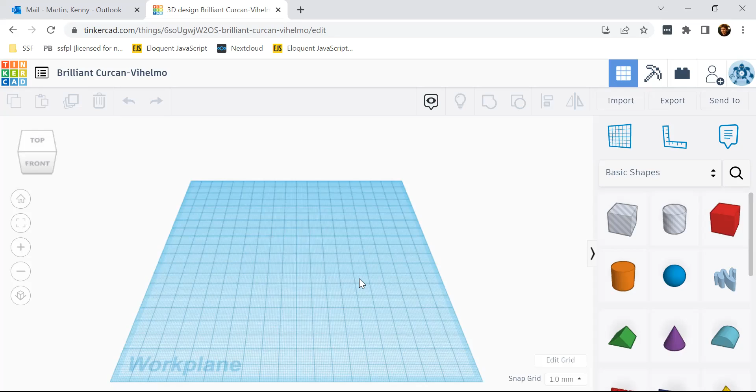So you want to make sure that your designs are on this work plane, or at least part of them is.

Up here it always gives you a random name for your project. I'm going to go ahead and change this to Picture Frame.

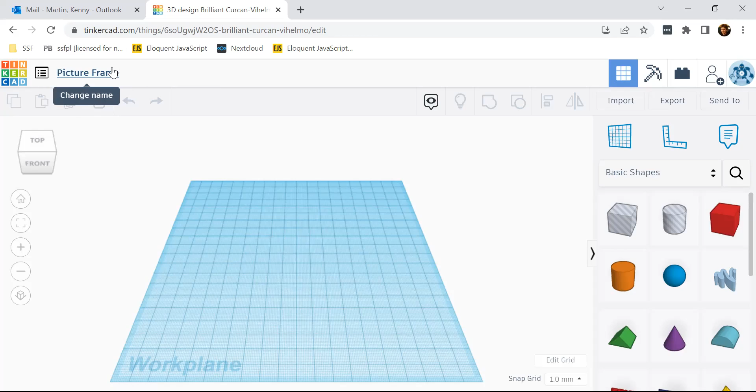Hit enter, and that renames it, so it's a much more meaningful name, and it'll be easier to tell what this file is when I'm looking at my list of files.

To go over some basics of Tinkercad, you have different shapes over on the right-hand side here. You can drag them onto the plane, or you can just click, and you'll see this outline of a box.

It'll stay as an outline until you left click again, and then it will place it down wherever you click.

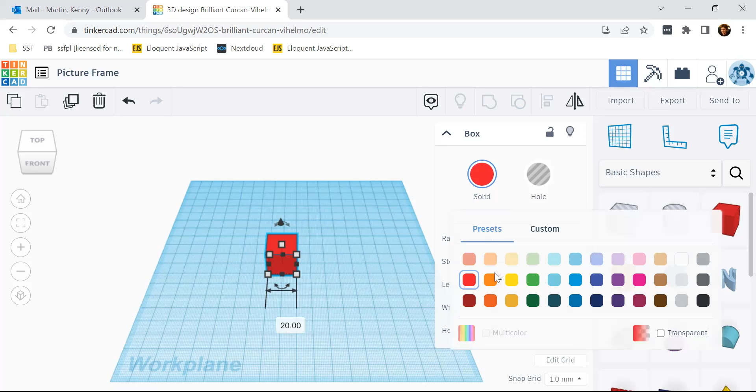One thing I want to point out: don't worry about the colors of the objects in Tinkercad. The color of your printed file depends on what color filament you load into the 3D printer, and it doesn't matter whether this is red, orange, or purple.

The colors in Tinkercad just help you distinguish between different objects, so we'll stick with the default red.

Now, some things you can do with an object—maybe first I should explain how to change your view.

You can use this box in the top left of the screen to change your orientation. You can click and drag it with your mouse to rotate it, or if you want to go to the front, just click on the front and it'll go like this.

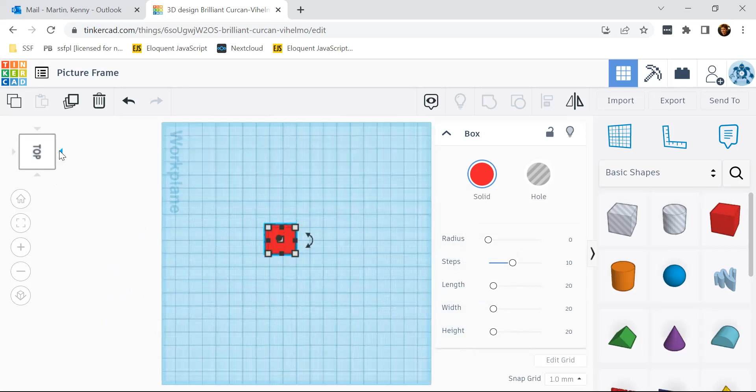You can also use the arrows to turn it, and that will put you directly in that direction.

Another way to change your viewing angle is to hold down the right mouse button and drag your mouse cursor around—that changes your view as well.

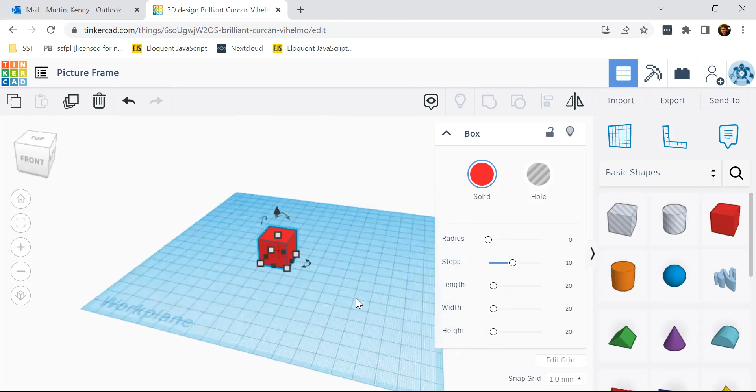Another useful thing to know is you can zoom in and out. If you scroll down on the mouse wheel, it'll zoom out, and if you scroll up or forward, it'll zoom in.

So you'll see there's really 4 different icons here that you can use to adjust the box in some way. There's these white corner ones that will increase or decrease the size of your box in all directions. You can see doing this, it doesn't increase the height, but it does increase the length and width of your box.

I think it started out at 20x20, something like that. I don't know, let's see. Okay, there we go, back to 20x20.

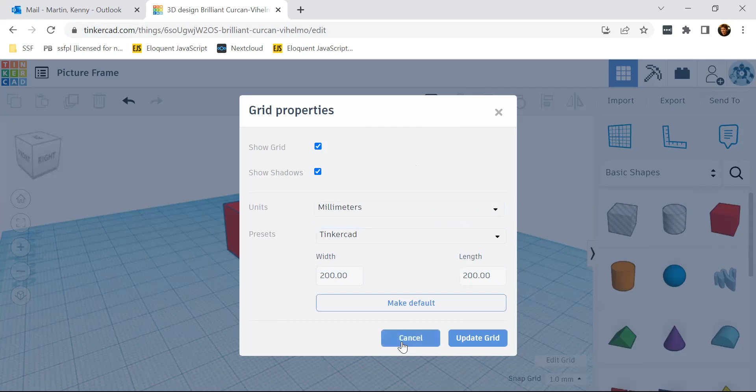Okay, so the last two that you will want to know is this black cone shape at the top here. This basically doesn't increase the size of the object in any way, but it does increase how far up and down the box is. So you can see I lifted it up, so now there's space between the work plane and the box.

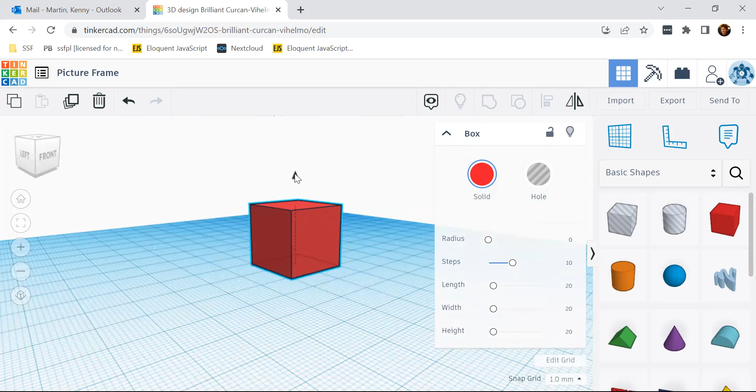Zoom out a little bit. We want this number right here to be 0. That lets you know that you are on the work plane. Anything below the work plane will be negative. You can see it's -1, and I'm a little bit below the work plane.

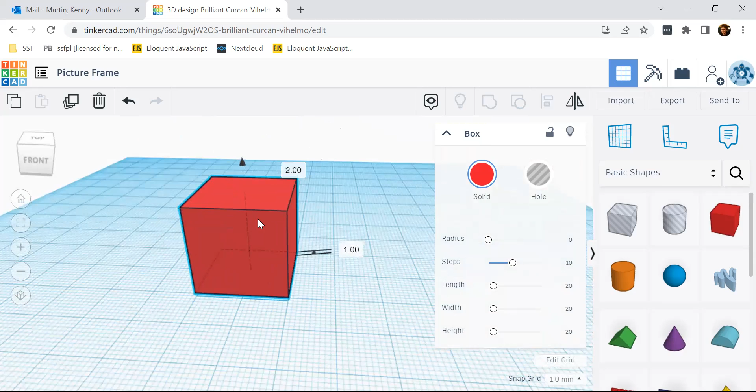And any positive number in that box means that I'm above the work plane. So I'm at 0, now I'm at 1, and I'm a little bit off of the work plane. So we'll go ahead and put that back to 0.

All right, and then lastly, there's these curved arched arrows. This basically lets you rotate the object in any number of directions. So I could go ahead and turn this 90 degrees. It's a box, so that doesn't really make much of a difference. But if I had designs on these sides, then I might want to rotate it.

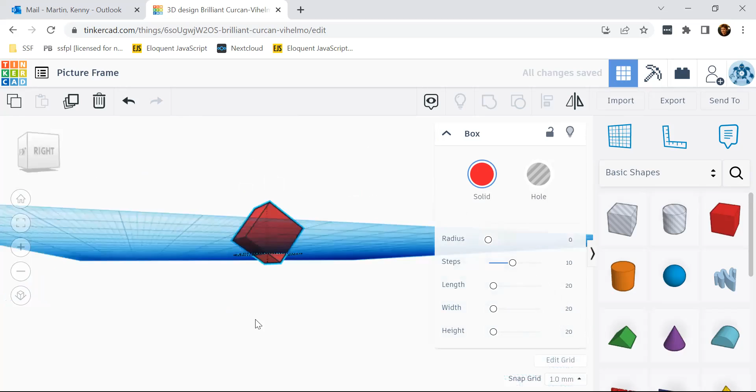But you can see, you could rotate it this way. And if you wanted it to be like at an angle, for example, you could leave it like that. Okay, so we'll just go back to 0 there. Okay.

I think that's the basics of Tinkercad. There are more advanced concepts that I'm going to be going over, but that is part of the design of the photo frame. So I may just start designing the photo frame, and then when I get to those more advanced parts, I'll slow down again and explain things a bit more.

Maybe before I go into the making of the photo frame, I'll just show you over here. Right now, this is set to basic shape. So you have the box, you have a cylinder, you have like a roof shaped object, you have a cone.

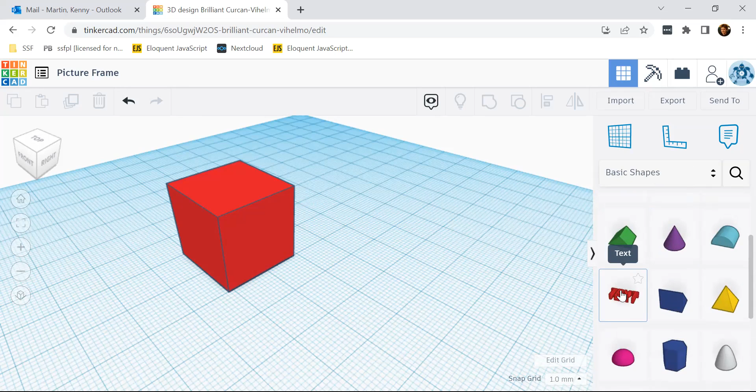If you want text, this changed, I think, recently from when I first learned Tinkercad. When I first learned Tinkercad, there were individual letters that you could drag onto your work plane. I think that option might still exist, but I know that you can also just drag this text shape. They categorize it under basic shapes, and you can change what the text is right here.

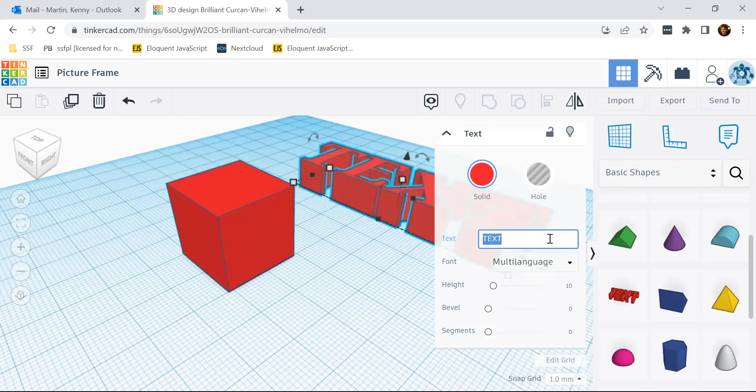So if you wanted to put your name, for example, I could type Kenny, and that text has changed to Kenny.

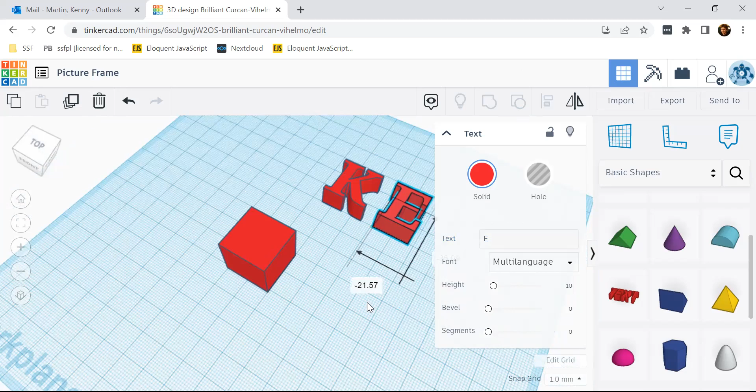You could also just make it one letter, K, and then if I wanted the next letter to be separate, I could do the E, and now I'll have two objects instead of one object, so I can move them separately.

To move an object, you can select it and drag it with your mouse, or use the arrow keys on your keyboard. As long as an item is selected, you can see the K is selected because it's got a blue outline and dots around it. Also, this box is open right here, showing that the text is K.

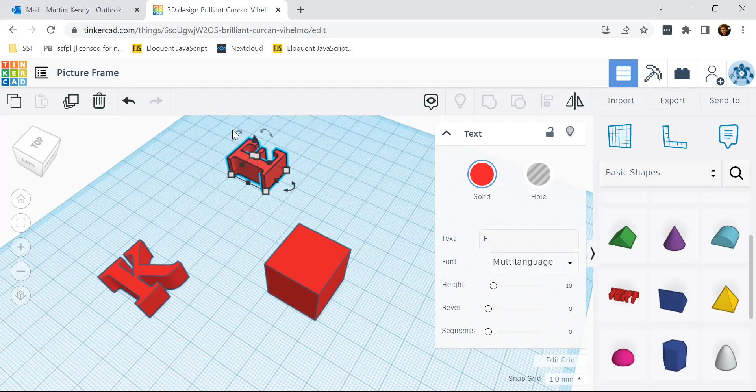So that's how you know it's selected. If I were to select E, this box would show up showing text E. The E is highlighted. If you click on the box, it tells you the box is selected, and then you have some customization options right here. If you don't have anything selected, then there's no information box here.

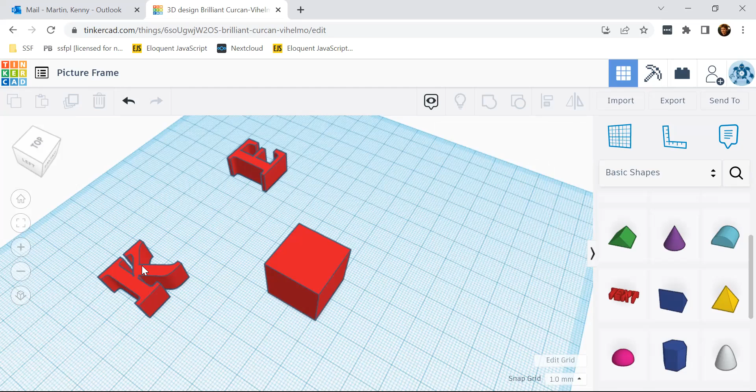I think now is the time to start with the steps of the photo frame. So I'm going to select both the K and the E, and you can do that by selecting one and then holding down Shift and selecting the other.

So you can see now it's changed to shapes 2. I'm just going to go ahead and hit this garbage can to delete them. You can also press the delete key on your keyboard.

Okay, so I need 2 boxes to start the photo frame. Now I could just click on a box here and bring another one onto the work plane. That's totally fine.

But another thing you can do is select this and then choose either copy or duplicate. I'm going to go ahead and just do copy. I'm on the top left here, circling my cursor - it's the leftmost one, copy. You can also hit Control-C, and that will also copy it.

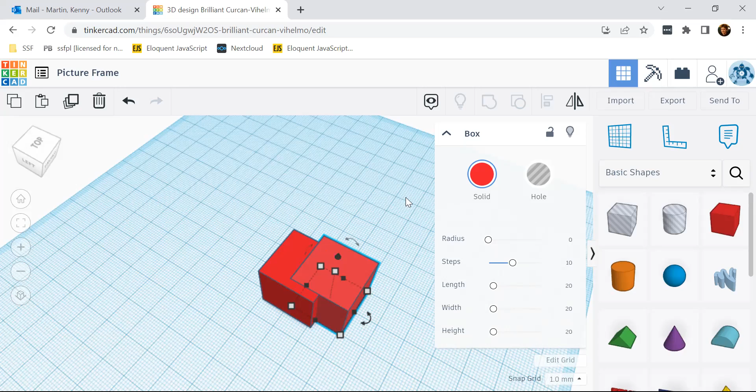So I press copy, and it doesn't look like anything happened, but I'm going to go ahead and move it. Oh, right, yes - so nothing happened because I haven't hit paste yet. So if you do copy, you have to paste the shape in. And if you duplicate, you don't have to do paste. But anyway, so I copied and pasted another box.

So let's just go like this. And we want one box to have, okay, let's see.

Okay, so I'm not sure why the right side of the box looks like it's slanted, but I think that this is correct, and I think it's just - I don't know. I'm hoping that it's just an optical illusion kind of thing.

But you want one box to have the dimensions of being 10 millimeters high or 0.39 inches high, 105 millimeters wide or 4.13 inches wide, and then 4.72 inches or 120 millimeters long. So this way is 105, this way is 120, and this way is 10.

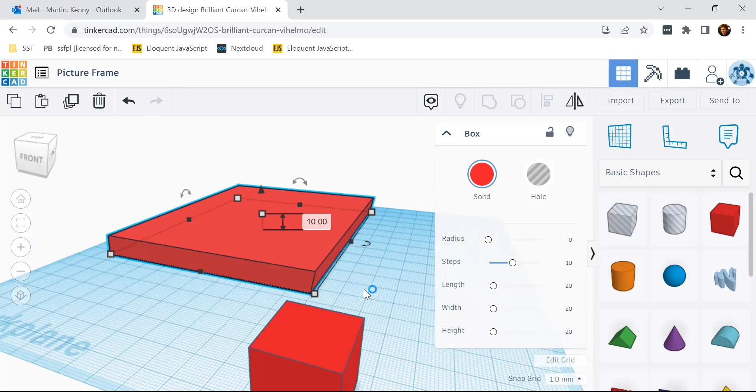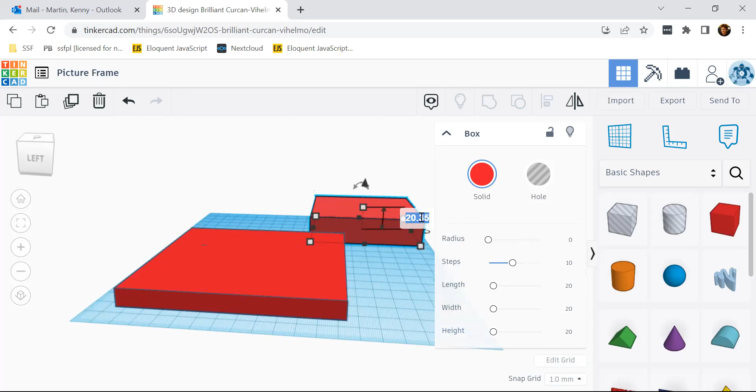Okay. And the dimensions for this second box are 30 millimeters tall, or 1.18 inches tall, 2.95 inches or 75 millimeters wide horizontally, and 3.35 inches or 85 millimeters long vertically.

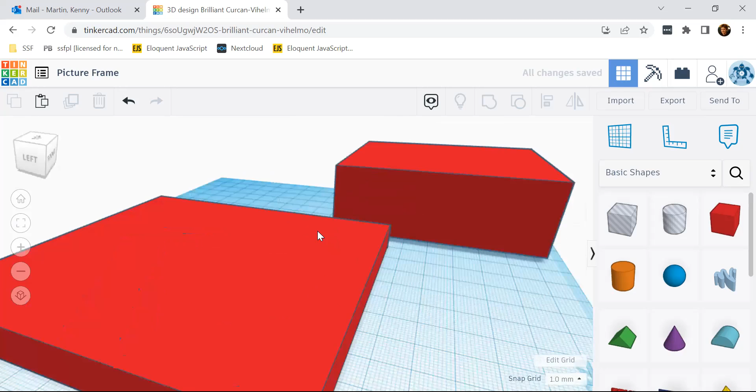And then you want to raise this by 2 millimeters or 0.08 inches. There we are. So now you can see it's just a tiny bit off of the work plane.

And we want to make the edges of each box round or rounded. So you can change this radius slider here. When you select the box, you can make it more of a circle shape. The further to the right you increase the radius, the more of a circle it becomes, and the more to the left you bring it, the more of a square it becomes. We're just going to set it to 2, and we're going to do the same thing with this other box.

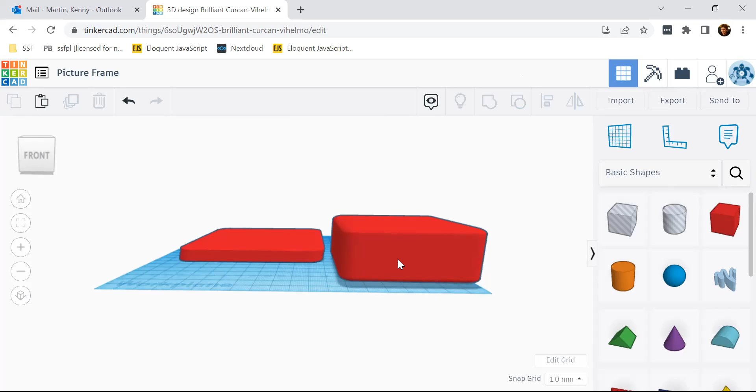Okay, so next I'm going to show you the align tool. This is something you can use to make one or multiple objects centered. So I'm going to select both shapes, both boxes, and then go up here to this align tool. You could also press L, and that will bring up the align tool.

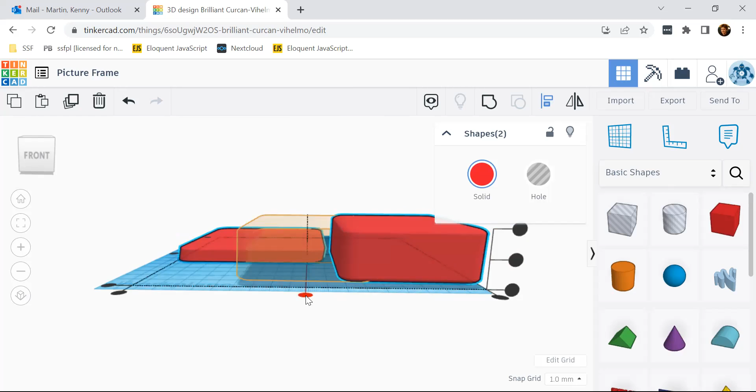So you can use these dots to align objects in the center, which is what we want to do with these two objects. You don't want to use these 3 dots in this particular instance, because this raises or lowers them - it aligns them up and down. We want to use the ones that don't change their verticality. So I'm going to click on this one, and you can see that has kind of centered them in one way, but then I'm also going to click this one, and that will center them completely.

For this next part, this is an important concept in Tinkercad known as creating a hole. Right now, both of these shapes are solids, they're red. But if you click here, you'll turn them into holes. We just want this box that's in the center to become a hole. Basically, it tells the printer don't print anything wherever this object is touching.

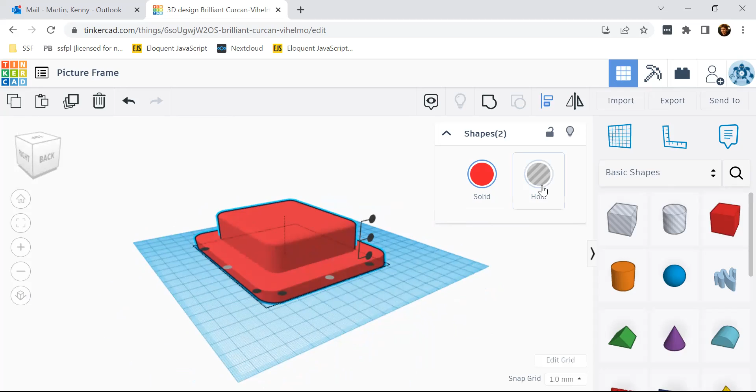So you'll see in just a moment. Okay, I guess both were still selected. That's okay, if you ever make a mistake you can hit Control Z or this undo arrow. Let's see what happened here. Okay, so I should just have the one shape selected, it just says box, so I'm going to choose hole. There we go, that's what I wanted.

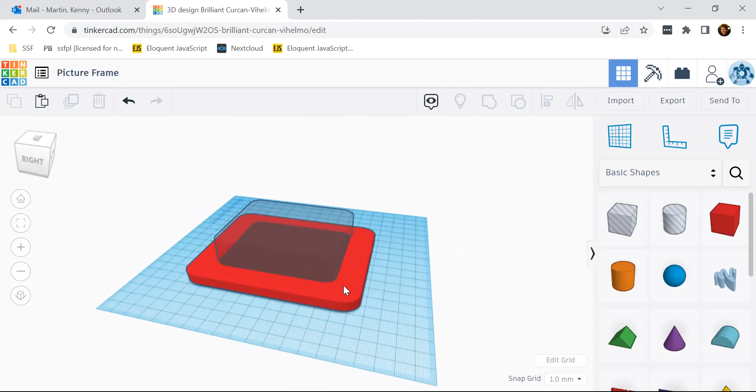Right now it's showing you a preview of what will happen if you were to complete the process. To complete the process, you need to select both items and group them together. I'm going to click on top, and you can see this smaller square is creating, oops, wow, that went really far, creating empty space within the larger square.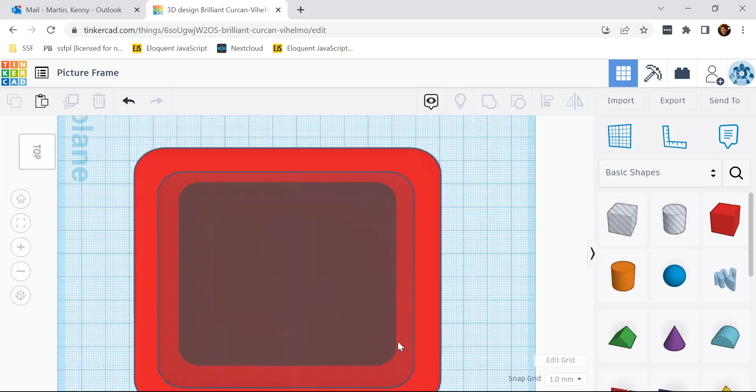You can just click on one and then shift click on the other to select both. You could also just drag your cursor over whichever shapes you want to select and let go, that will also select them. However you select them, once selected, go ahead and hit group or Control plus G. Now you can see even more clearly what turning the smaller box into a hole did - there is an empty space here, and that's going to be for your picture.

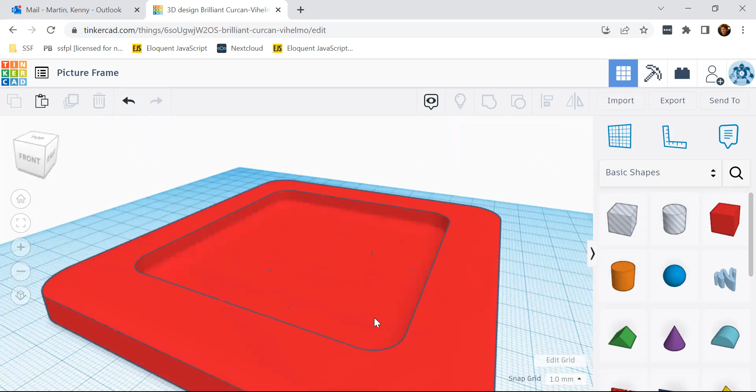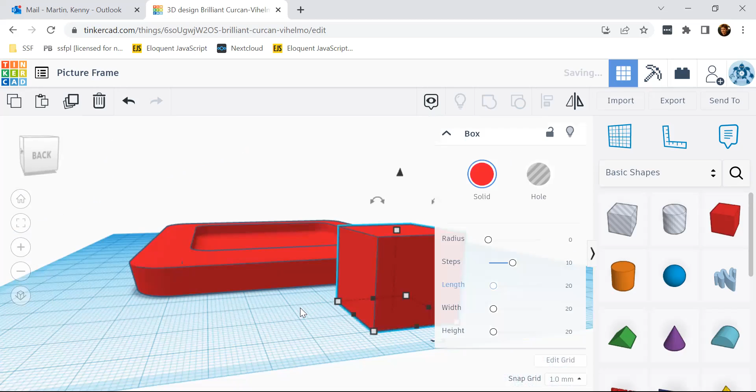So for the next step in the photo frame design, we're going to need another box, and this box is going to become a hole so that we can create a slot in the side here to slide a picture into. I'm just going to add another box to the project, and I'll show you the dimensions in just a moment.

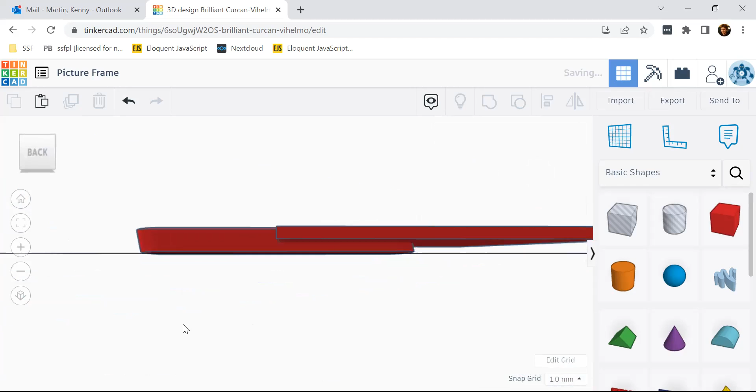Okay, so this box that I just created is 3 millimeters or 0.12 inches tall, 95 millimeters or 3.74 inches wide, and 95 millimeters or 3.74 inches vertically long. And we want to raise it by 4 millimeters. 1, 2, 3, 4, there we go. It is 4 millimeters off of the work plane, as you can see here. The other box is 0 millimeters above the work plane.

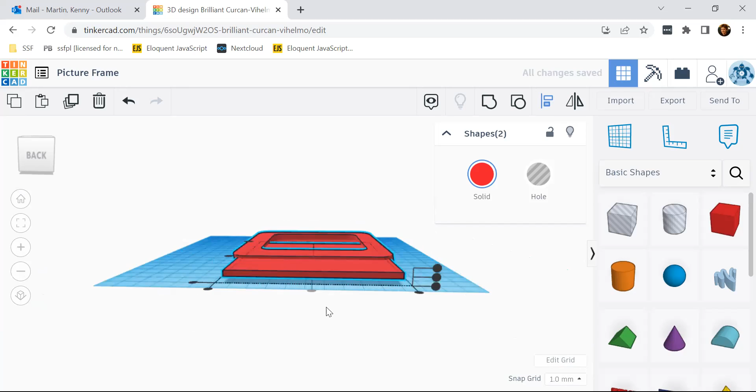Okay, I'm going to select both items and align them in the center again. And again, I don't want to change their verticality, so I'm just going to choose the 2 middle dots vertically and horizontally. So this is the horizontal one, and here's the vertical one.

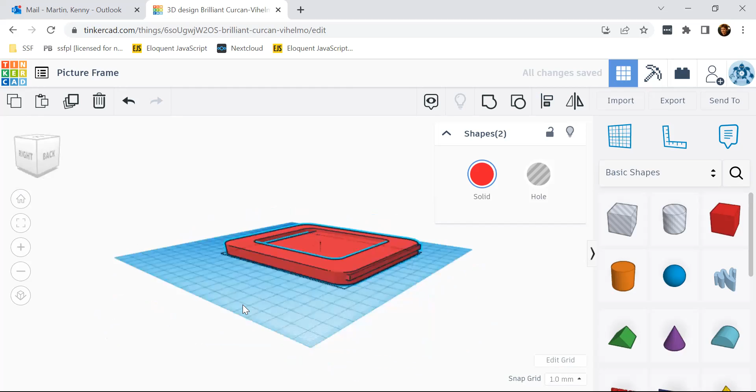Okay, and now I need to align both objects on the right, so I'm going to click this button there. I feel like it would have been better to turn that box that I just created into a hole earlier, so keep that in mind if you're doing this a little bit after me, but let's see if I can.

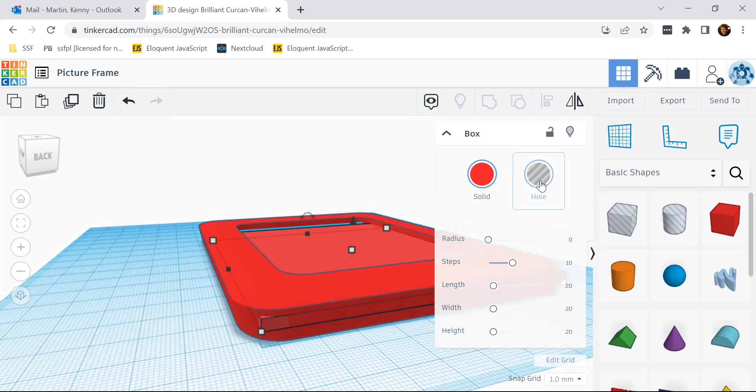So I still have 2 shapes selected, now I just have one. Okay, that wasn't too bad, but I would still turn it into a hole before aligning it. Anyways, time to press this hole icon there, and then I'm going to select that, and I'm going to group. There we go, and you can see there's now a space where you can slide your photo into. But note that this side is still solid.

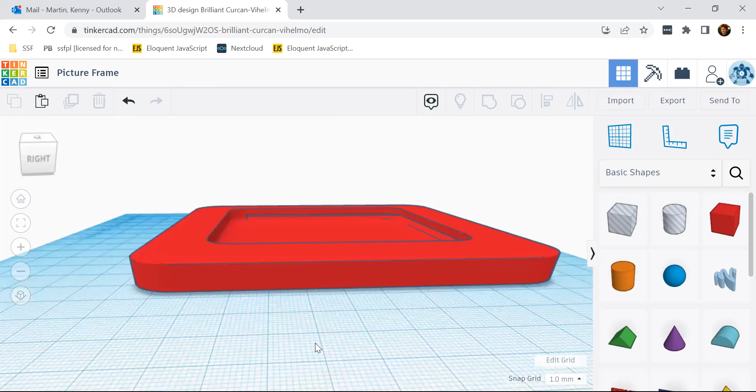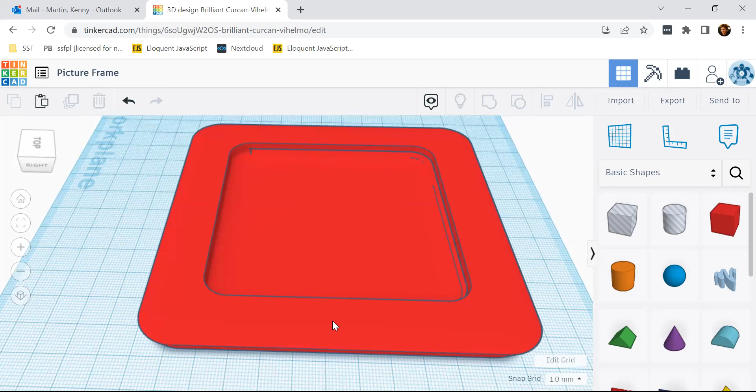Okay, so next we want to rotate the frame by 90 degrees to make it stand upright. This is because we're going to be adding the stands on the back. Let's see, I think I want this one, and I'm going to just click 90. There we go. And I'm going to change this to 0. There.

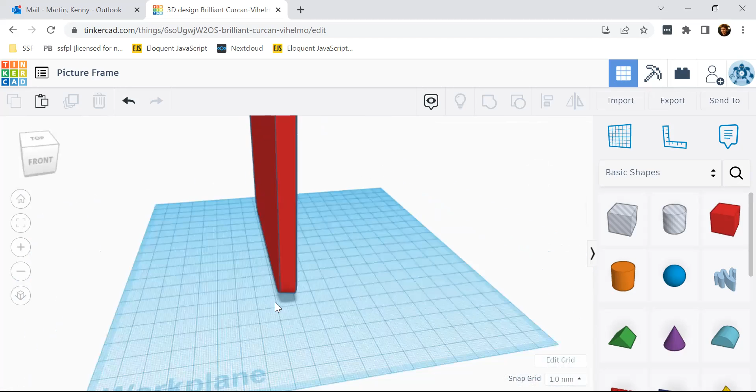Okay, my picture frame is looking still a little angled. I think maybe I might have messed with some setting when I was demonstrating how to resize objects, so hopefully yours is more flat. I don't know, but I think mine is slightly less than ideal, but that's okay. So to create the stands, you need to use the wedge.

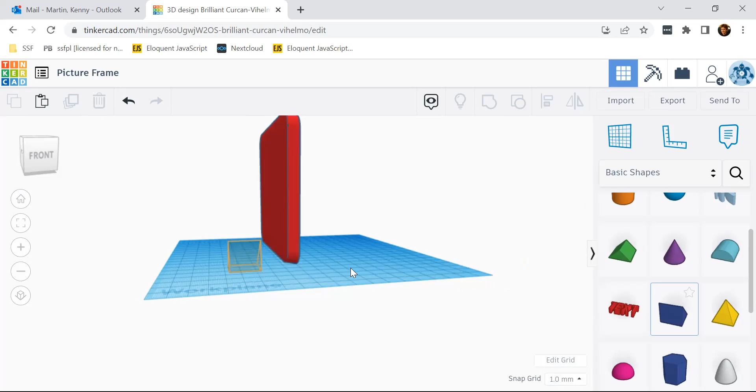Okay, this is the wedge. So we'll go ahead and drag one onto the work plane.

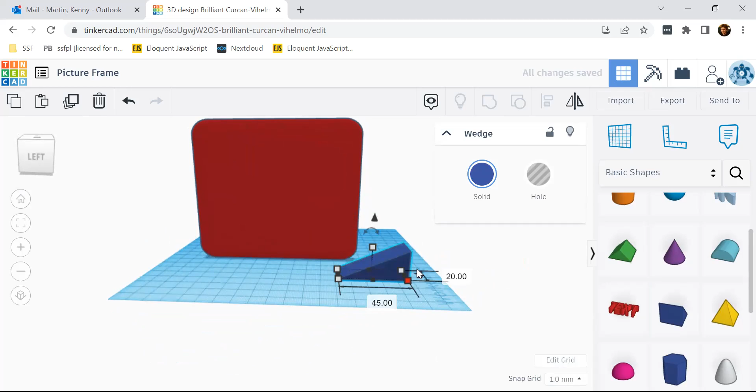And for the dimensions, you're going to want 45 millimeters that way, 90 millimeters this way, and then this way, 8 millimeters. So if you want those in inches, this would be 0.31 inches, this would be 1.77 inches, and this would be 3.54 inches.

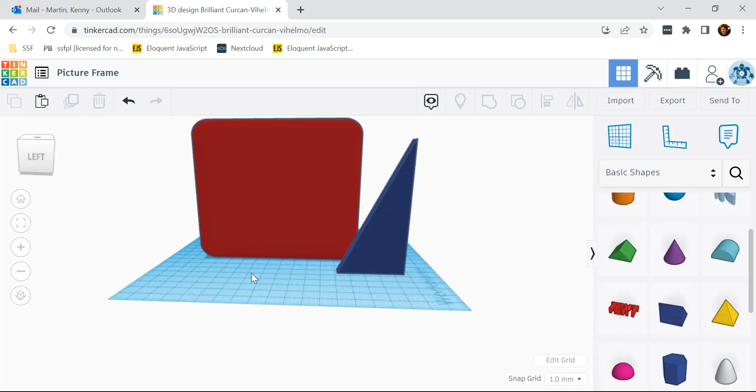Okay, and I'm thinking about how you can do this. Yeah, I think it's doable this way. I was going to say that you might want to change where the work plane is to make sure that this wedge is flush against the frame. But let's see what we can do.

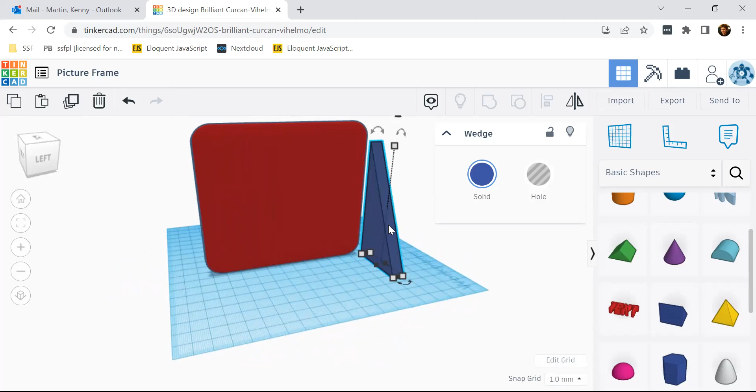So we want to rotate this 90 degrees, I think. Or actually, I think it's negative 90. Yep, because we want it to turn that way. And then, all right, we want them to overlap by 8 millimeters. I mean, this looks good. I think that this is fine.

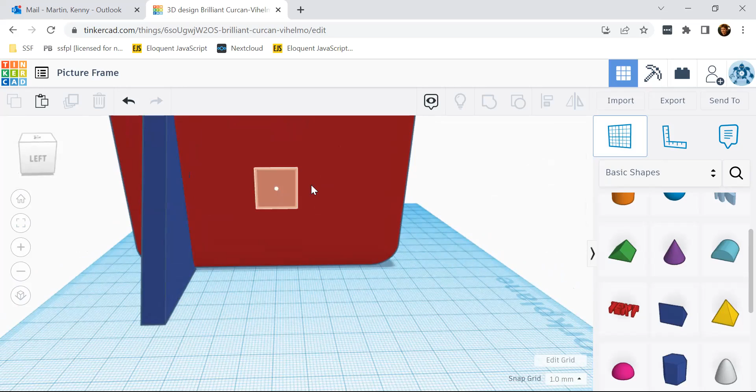Okay, for the sake of tutorial though, for this next wedge, I'm gonna click on this work plane tool. You can also press W. And you can see there's an outline of a square, and it's basically asking where do you want your work plane to be. So I'm gonna zoom out a little bit and I'm just gonna click here.

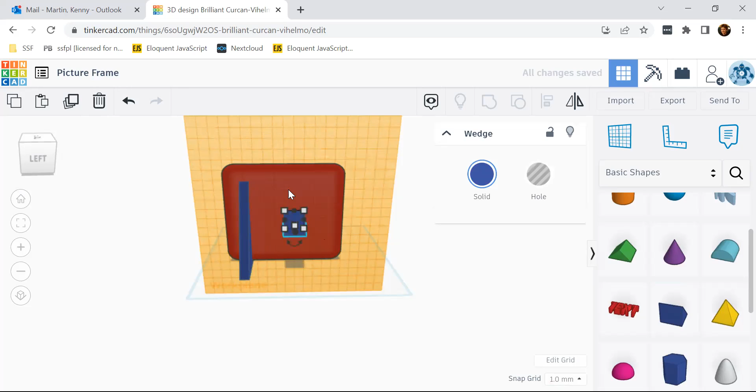So now 0 is gonna be flush against the back of the photo frame. So I'm gonna go ahead and put another wedge here. And now it starts out flush against the photo frame because I've put the work plane on the back. So I've changed the work plane from being down here to being vertical. It's now this yellow grid as opposed to the blue one down here.

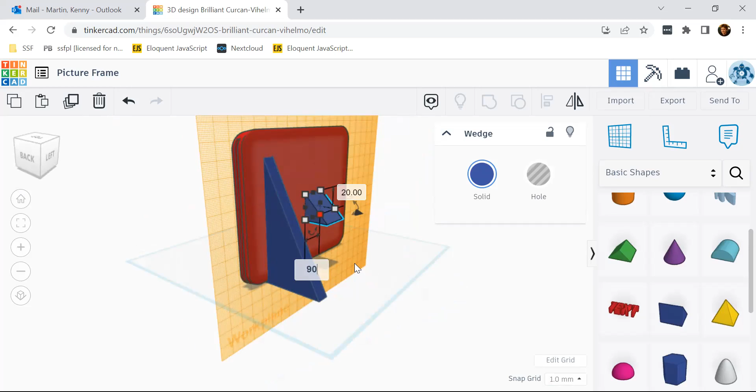All right, and then I want to duplicate the dimensions. All right, so what are they? I think I want this to be 90. No, let's see, undo. Here we go. I think I want this to be 90. Yep. And...

Yeah, I think for this actually, not using the work plane would be more helpful. So I'm actually going to delete this. To get the work plane back, you can just click the work plane tool and click in that blue square area. I think the simpler thing is to just click on this duplicate.

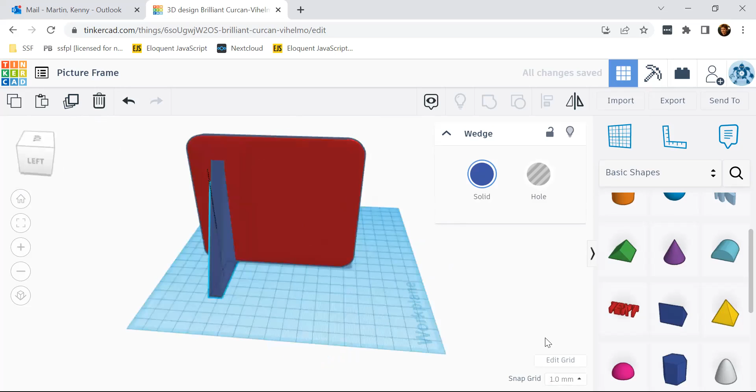And now I can just move the duplicated shape over. All right. So when you duplicate or when you copy, it keeps the dimensions of the object when you copied it. So that saves some time.

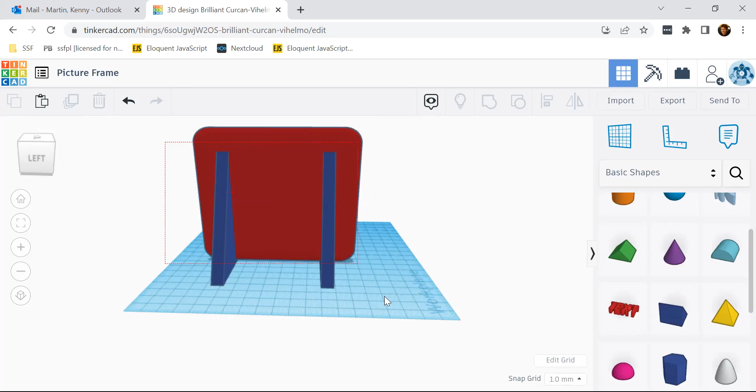Okay, so I want to group these three items, the picture frame and the two supports.

When you group objects, they become one unit. So if you move it, all of the grouped objects move together. Whereas if they were ungrouped, then whichever ones you had selected would move, but the others would remain where they were.

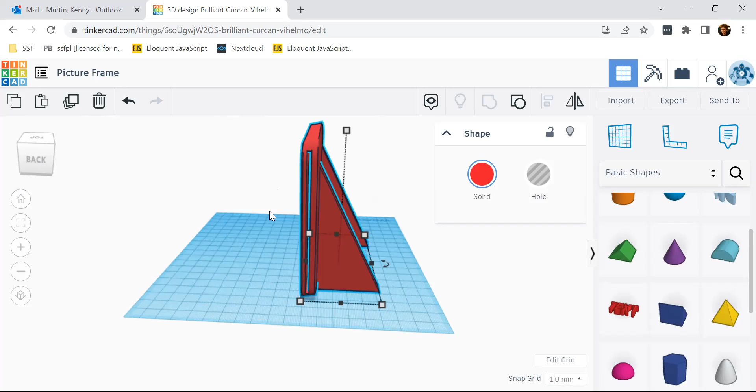Okay, so you want the picture frame to be looking like this with the front facing to the left. And you want to rotate this 20 degrees. Negative 20. I think that's right. Okay.

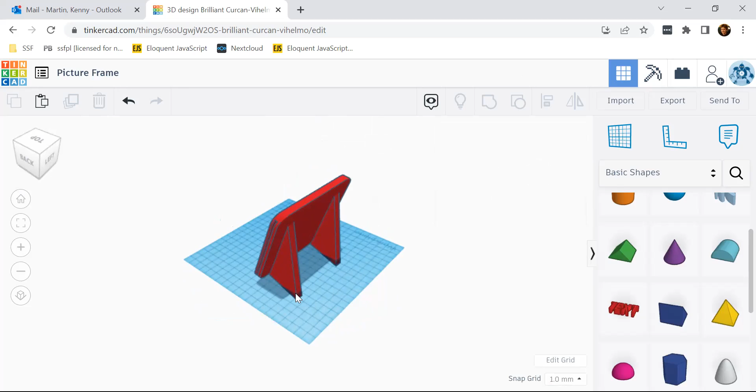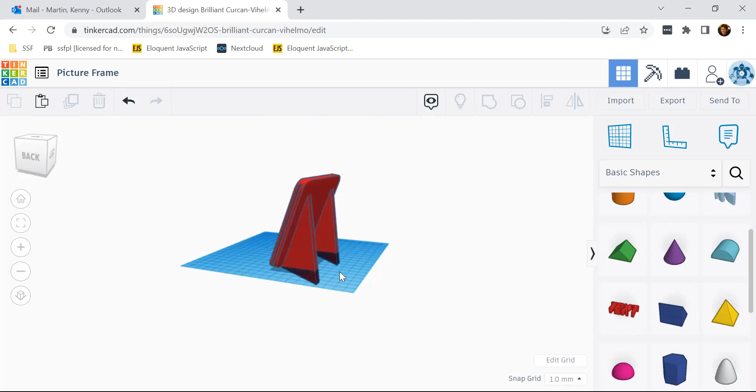Okay, and then we're going to push this down so that it's 15 millimeters below the work plane. Okay, so your picture frame should look like this. And the reason why we pushed it down is to make it so that the wedge shape is flat against the work plane. So you can see it's now flat as opposed to angled.

Just so you know, anything below the work plane will not get printed when you print it on the 3D printer.

Okay. Now we're just creating a box that we're going to turn into a hole, and we're going to use to completely remove the parts of the photo frame below the work plane. So we'll just make it the size of the work plane or even bigger.

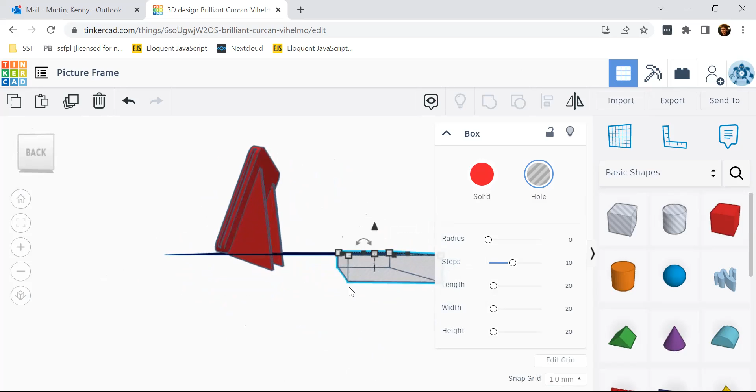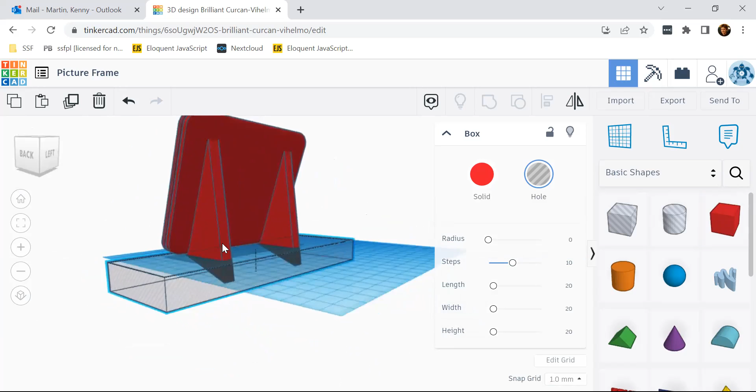And then we're gonna make it so that its height is 20, negative 20. So that's just the default height of the box object. When you drag a new box onto the work plane, its default height's 20, so I didn't change that. That's why we had to move it down 20 millimeters so that it would be directly underneath the work plane.

All right, we're gonna select both objects and group them. Okay.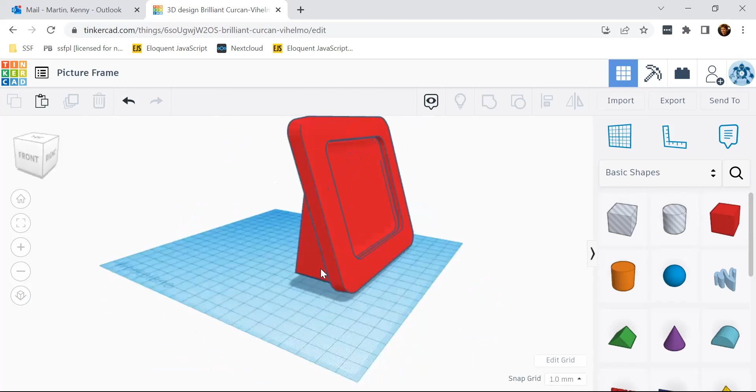Okay, so now if you wanted to add shapes to decorate the front of your picture frame, you can. But for the actual photo frame itself, we are done. We've got the supports, we've got the indentation to see the picture, and the indentation to slide the photo into.

This, like adding decorations to the front, is definitely where I would use the work plane tool. So to demonstrate in this video, I'm just going to do a simple heart shape. Before I take the heart, I'm going to bring the work plane here. And then when I place the heart, I'm going to place it somewhere like here.

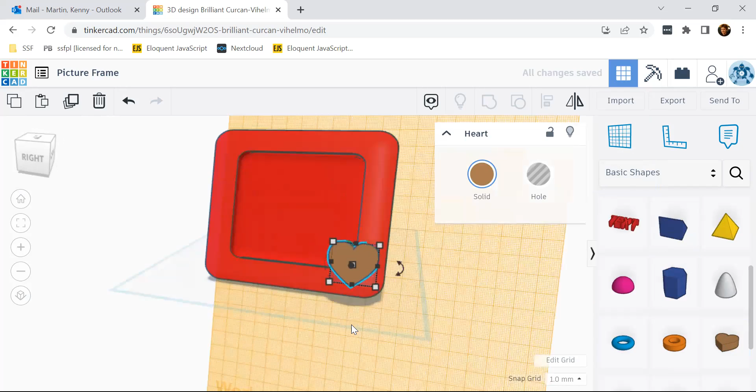All right, let's zoom in. I think I don't want it sticking out so much, so I'm going to change this from 10 to 2. And you can see that made it a lot thinner.

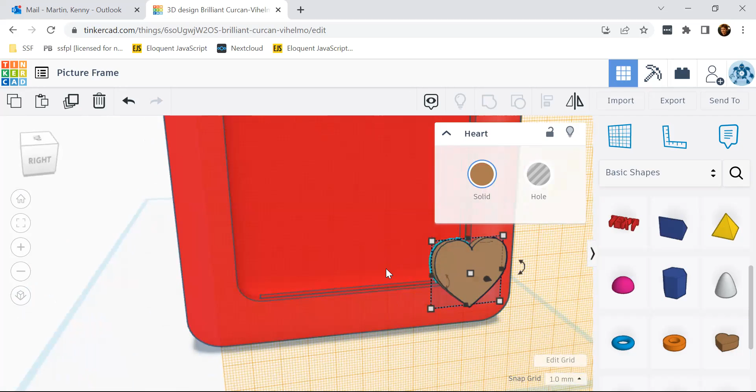I think having it rotated kind of to the left will be good. Let's see, I think it's this one. Let's see, which one is it? Nope, we don't want that one. Is it this one? Nope, must be this one. Yep, okay.

So, 13 degrees, that looks pretty good. I'm going to move it down.

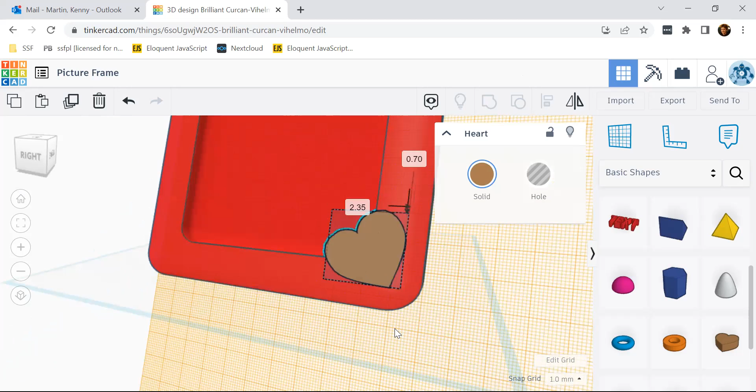I do want to just reiterate or mention again that the reason I'm having such an easy time rotating this heart and moving it around, all the while keeping it flat against the picture frame, is because I put the work plane on the surface of the photo frame. If the work plane were down where this blue outline is, which is where the work plane normally is, then when I rotated and moved the heart, it would more than likely become detached from the picture frame.

And that is something that would cause the print to fail. So if the decorations were not flush against the photo frame, then when you go to print it, best case scenario the decorations just wouldn't print, but the rest of the photo frame would. Worst case, the entire print would become derailed, and you'd have to go back and fix your file in Tinkercad in that instance.

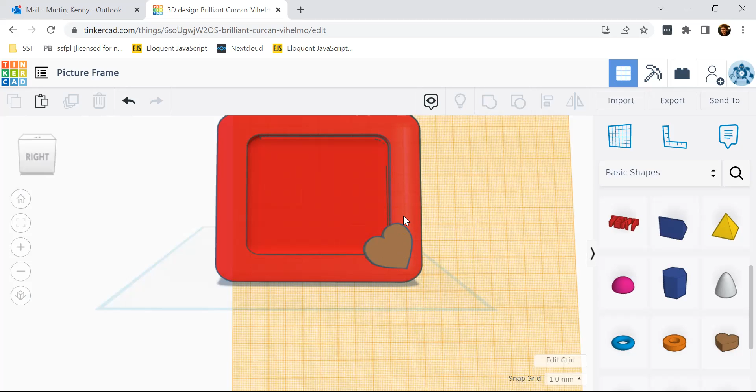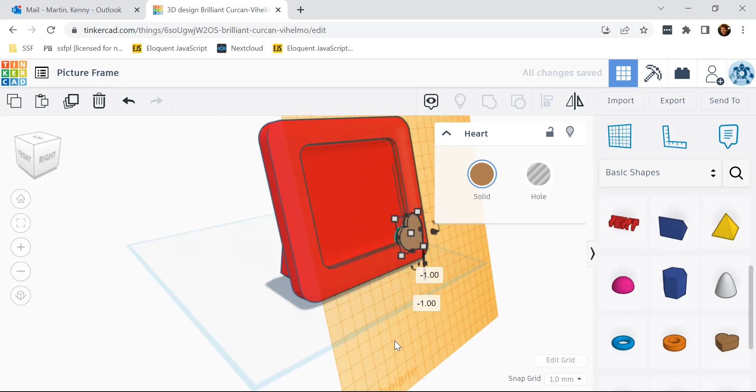All right, and yeah, I think that I might lower this just like 1 millimeter. So I'm going to go -1, because the work plane again is vertical as opposed to flat. This is just to make it even more likely that the decoration will print out, as opposed to being just directly flush with the photo frame.

All right, so now that I'm done adding the decorations, I can go back to the normal work plane. And then when you're all done, you can go to export, and you want to save it as an STL file.

So Cura is a computer program that we have at the library, and Cura is used as an intermediary between a site like Tinkercad and the 3D printers. The 3D printers require a certain type of file in order to read the print. 3D printers can only read certain types of files, and Cura can turn your STL file into the type of file that the 3D printers can read.

Okay, so make sure that when you export, you choose .stl.

Okay, and that is the basics of Tinkercad. I'm not going to go into this in this tutorial, but I do want to mention that if you're wanting to use the 3D printer that has 2 nozzles, that makes it easy to print an object using 2 different colors. If you want to make use of those 2 nozzles, you have to design your file a certain way in Tinkercad. So if you're interested in that, stop by the library and I'll be happy to show you how to do that.